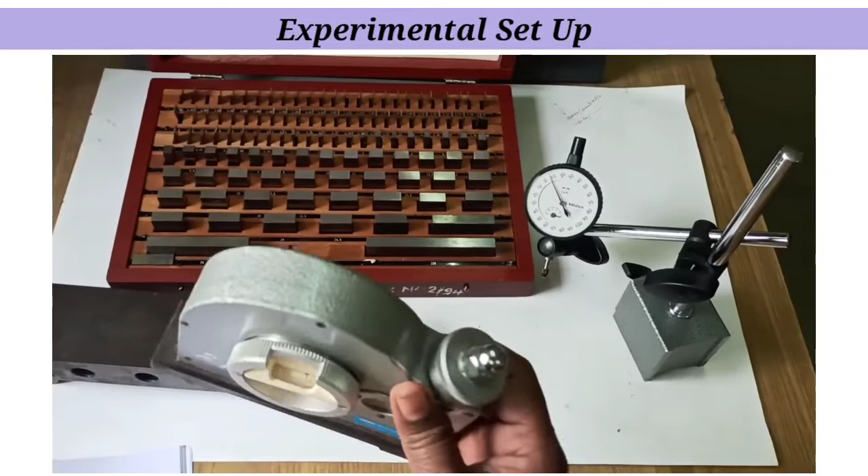Now we will place this component for the measurement by using the bevel clinometer.

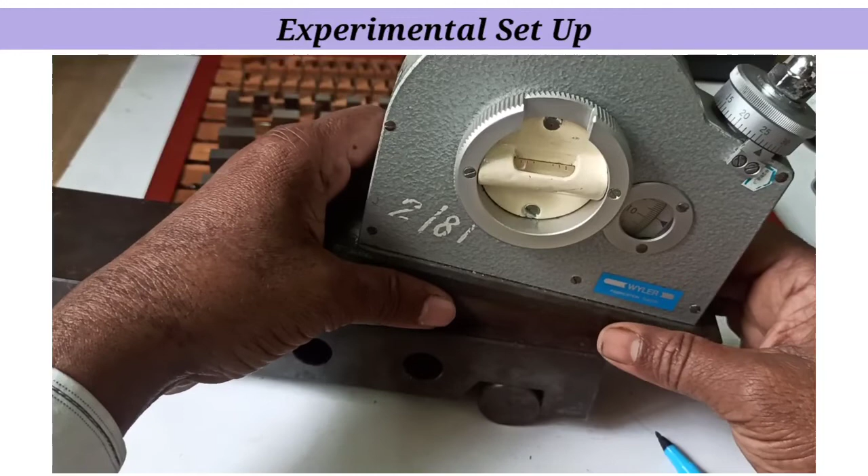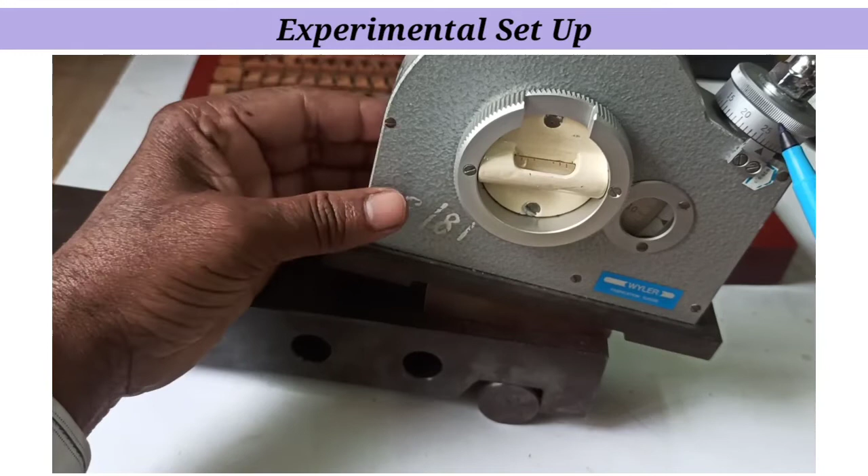So the component is placed here, on which we have to place the clinometer. Now the clinometer is adjusted in such a way that the bubble in the spirit level should be at the central position by turning this rotary scale, which is operated by this micrometer knob. So we'll turn it.

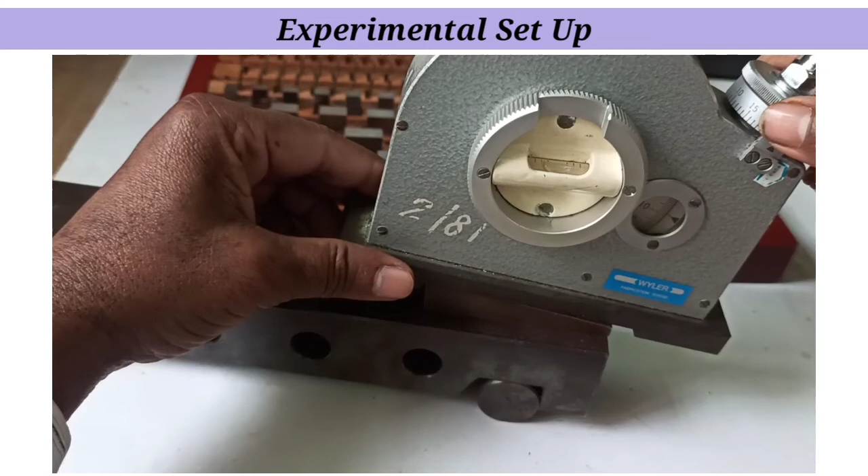Now the bubble in the spirit level tends to move in the right direction, as it is just moving. It is coming approximately at a central position. So next, by fine adjustment, we will locate the bubble position at the exact center.

Now the bubble in the spirit level is located at the exact central position. Now note down the reading. So this is 8 degrees.

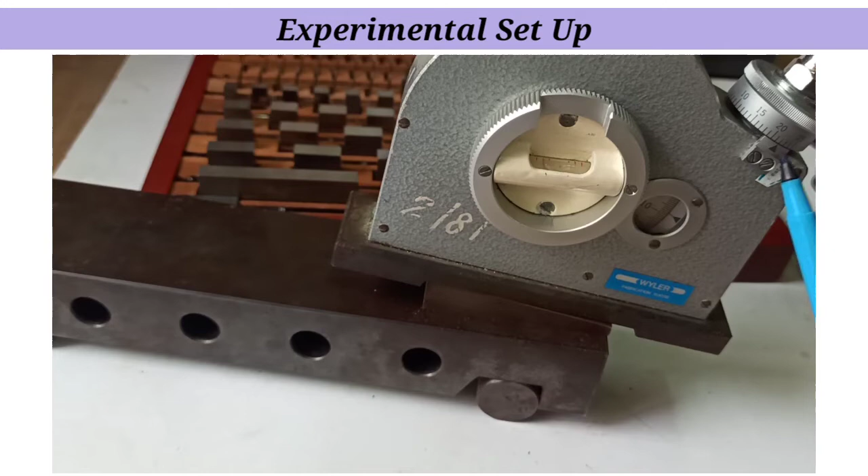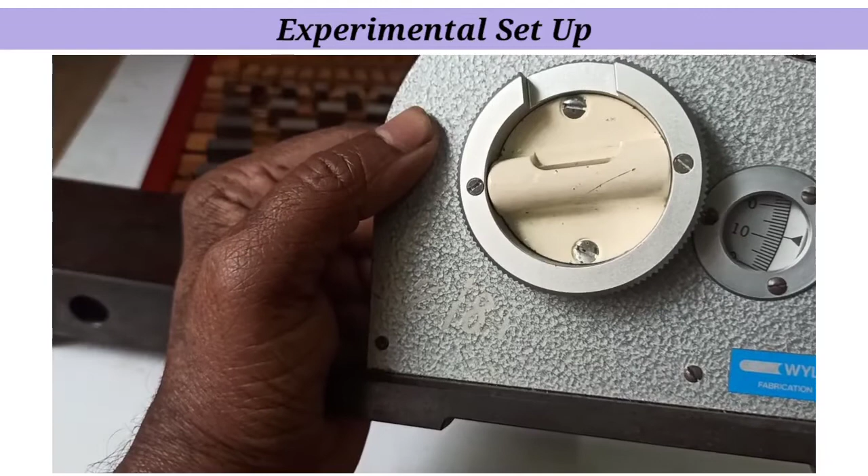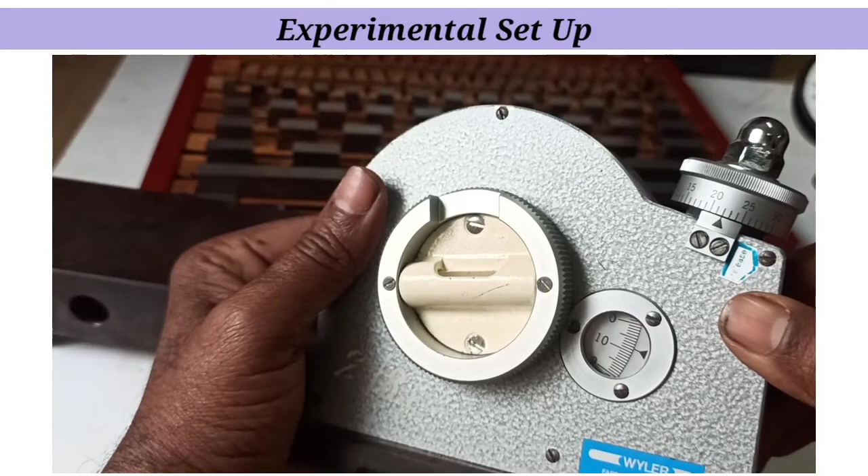You see the exact reading. So it just crosses the 8th division, and so the main scale reading is 8 degrees, and this micrometer scale reading is 22 minutes.

Thus the total approximate angle is 8 degree 22 minutes, measured by this clinometer, is noted down. Now next,

Now we have to find out the height of slip gauges. Already we have measured the angle of the component by using the clinometer, which is 8 degree 22 minute.

Convert this 22 minutes into degrees. So divide 22 by 60. It gives 0.367. So approximate angle is 8.367 degrees. Now using the sine formula, we can find out the height.

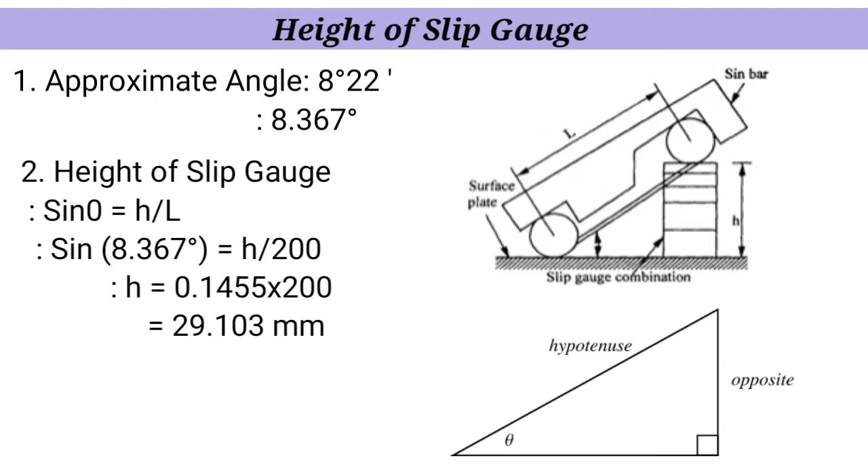Sine theta is equal to h by L. So sine 8.367 is equal to h divided by 200, as L is the center distance of the rollers of the sine bar. Height is 29.103 millimeters.

Next, we have to find out the slip gauges to set the required height of 29.103 millimeters. So from the given set of slip gauge box, consider the first slip gauge within a range of 1.001 to 1.009.

Select the slip gauge of 1.003 and subtract it from 29.103. The remainder is 28.10.

Now next, from the range of 1.01 to 1.49, select the slip gauge of 1.10 millimeter. Subtract it from 28.10, remainder is 27.

Now from the next range, that is from 0.5 to 24.5, select the slip gauge of 2 millimeter. Subtract it from 27, the remainder is 25.

Now from the last range, that is 25 to 100, select the slip gauge of 25, the remainder is 0. Thus the slip gauges required are 1.003, 1.10, 2, and 25 millimeter.

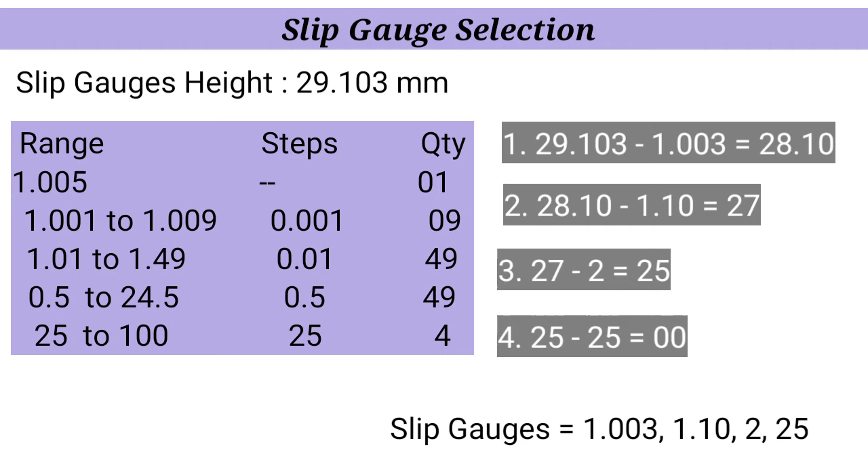Next, clean the surfaces of the slip gauges by using proper cotton, which we are using for the measurement purpose, so that there should be no dust particle on the super finished surfaces of the slip gauges.

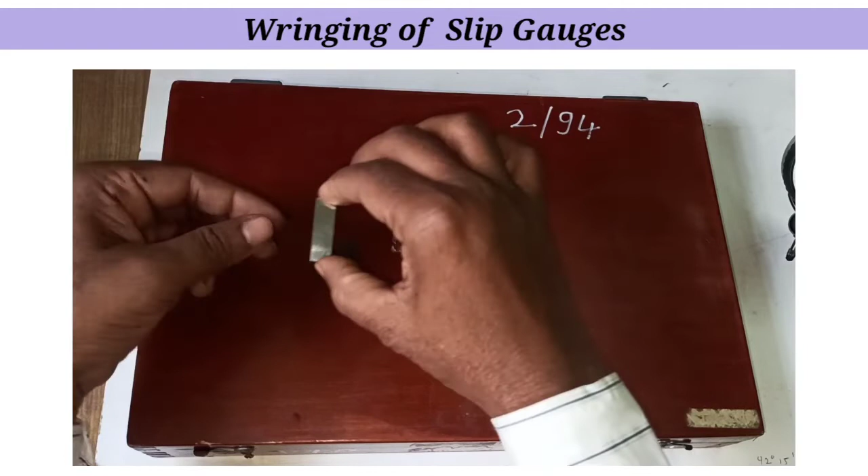I will consider the first piece of 1.005 millimeter. Then next is 1.47. What is the wringing procedure?

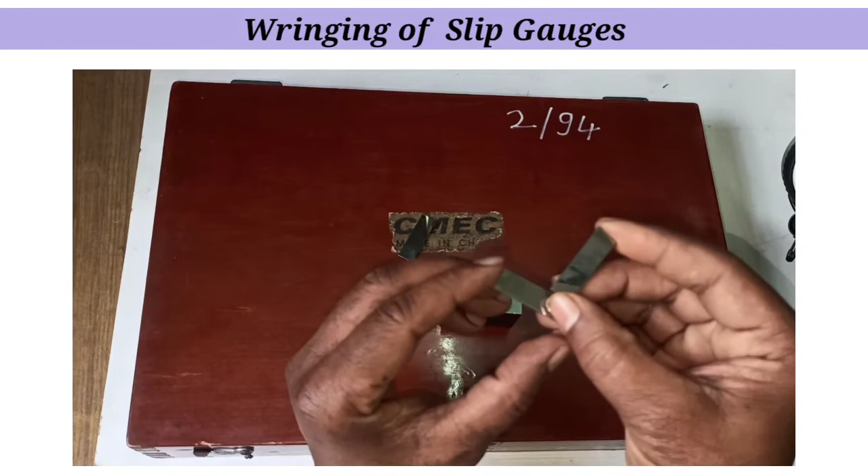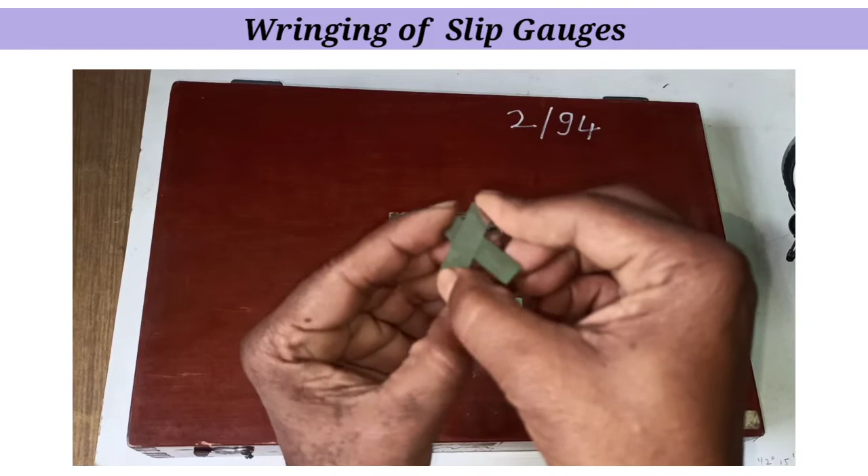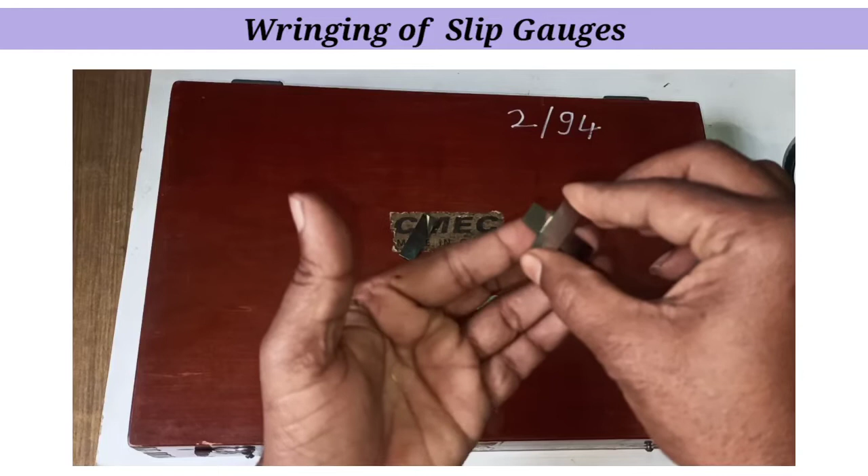Just place these surfaces over each other and just turn it. Squeeze the pressure between these two slip gauges and turn through 90 degrees.

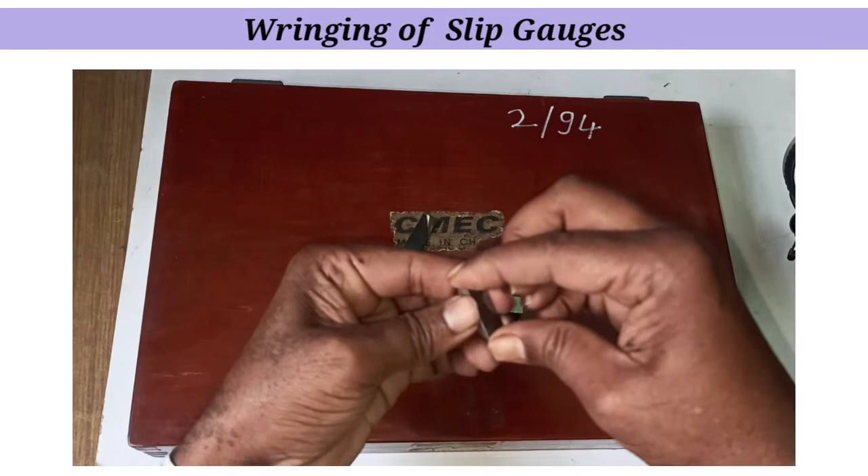Thus the slip gauges are wrung together with each other. Then consider the next piece. Clean its top surface.

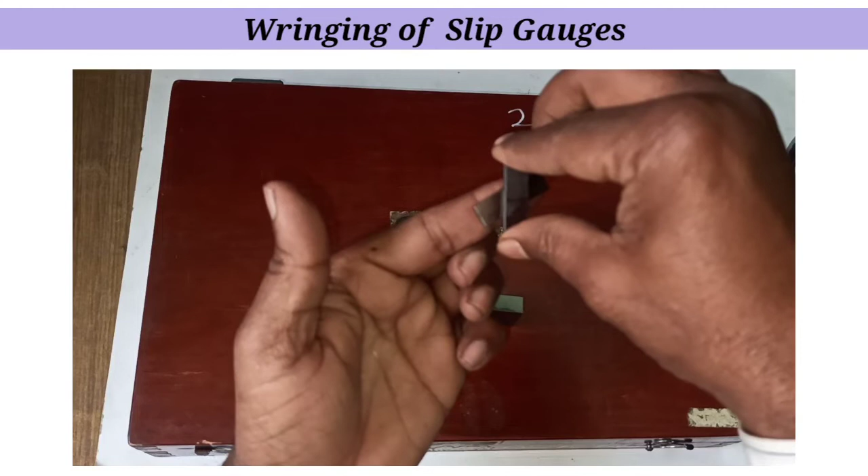Again place over each other. Just turn through 90 degrees. Thus the wringing is done here.

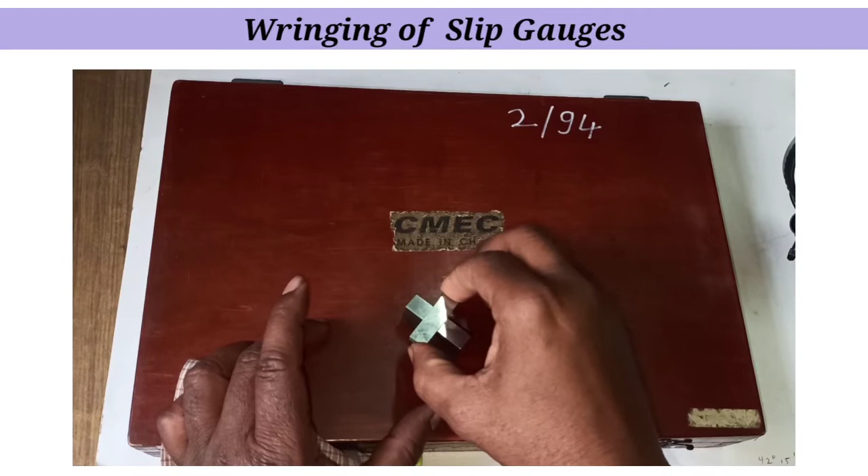Now consider the last piece. Clean its surface. Now place it at 90 degrees and just turn through 90 degrees so that they will wring with each other.

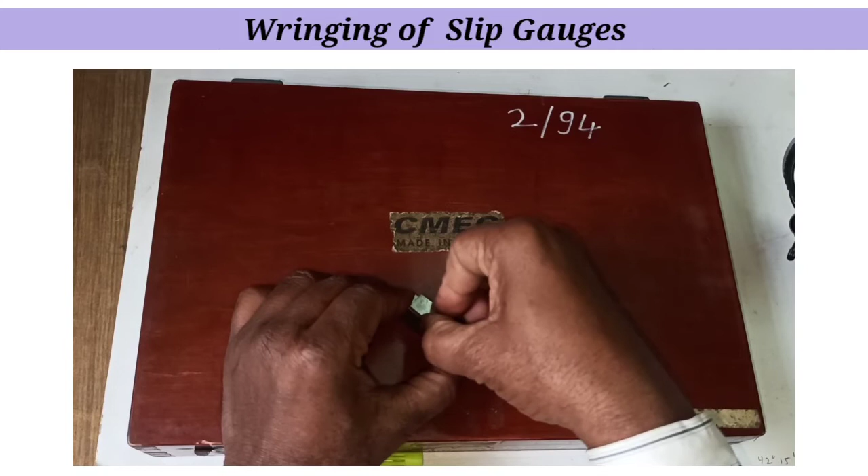Thus all these four pieces are wrung together by using the phenomenon of wringing.

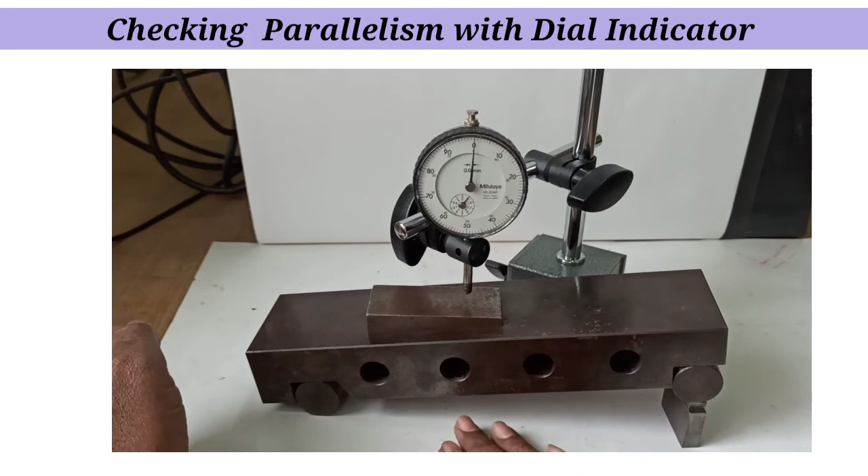Now in this last stage we have to check the parallelism of the surface with the top surface of a surface plate. Place the component on the sine bar. This is a dial indicator by which we measure the parallelism by observing the deflection made by this pointer while this plunger moves across the surface.

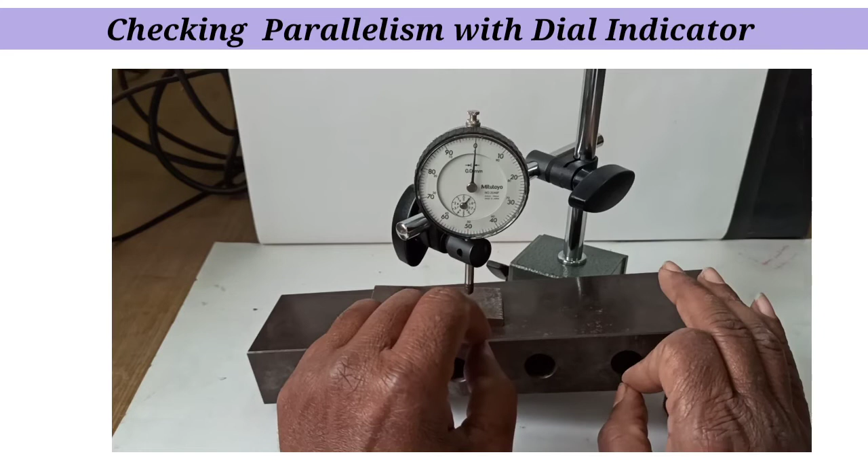This dial indicator has a total of 100 divisions. The value of one division is 0.01 millimeter, that is 10 micron.

Now when we place this plunger on the top surface of a component, as the plunger moves in the upward direction, the pointer moves in the clockwise direction.

We have to check the parallelism of this surface from this left side. Now we have to set this dial indicator for zero error. The dial indicator is now set for zero.

Now we have to move this dial indicator across the surface. Just move this stand and observe the pointer deflection.

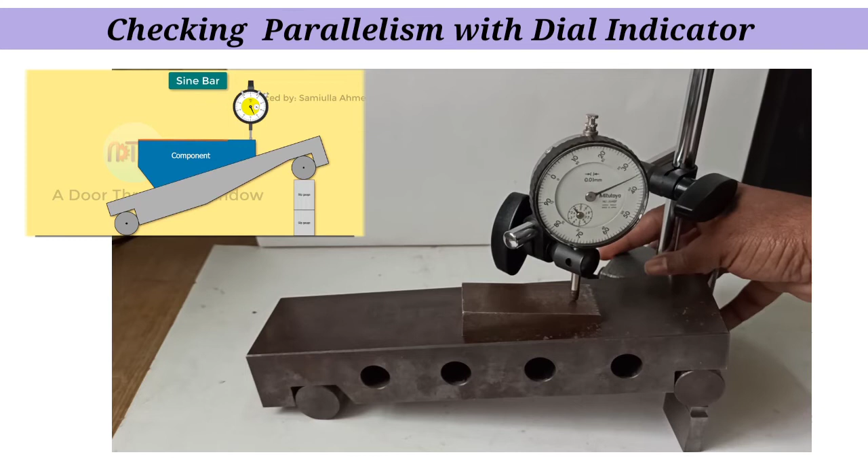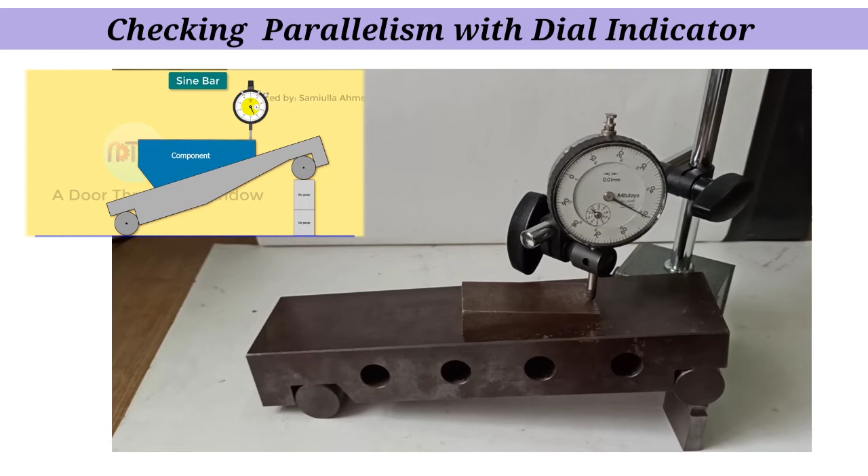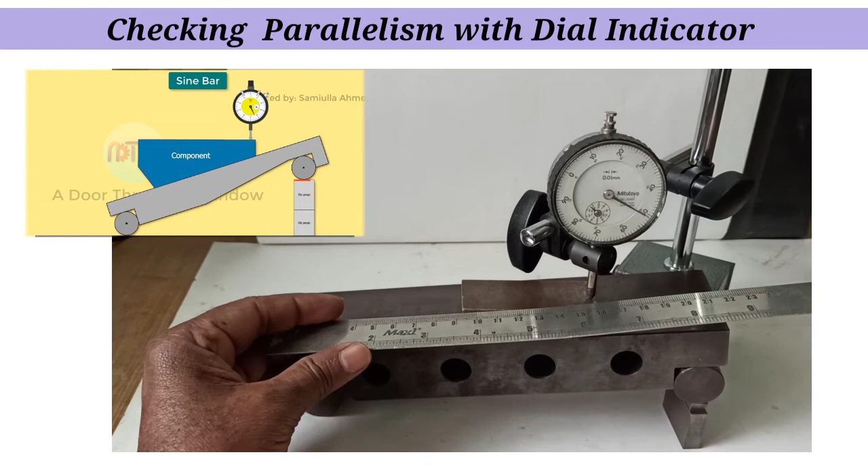As the pointer is moving in the clockwise direction, this surface is not exactly parallel to the reference surface of the surface plate. This means the surface is somewhat in the upward direction, like this, so that the plunger of the dial indicator is moving upward.

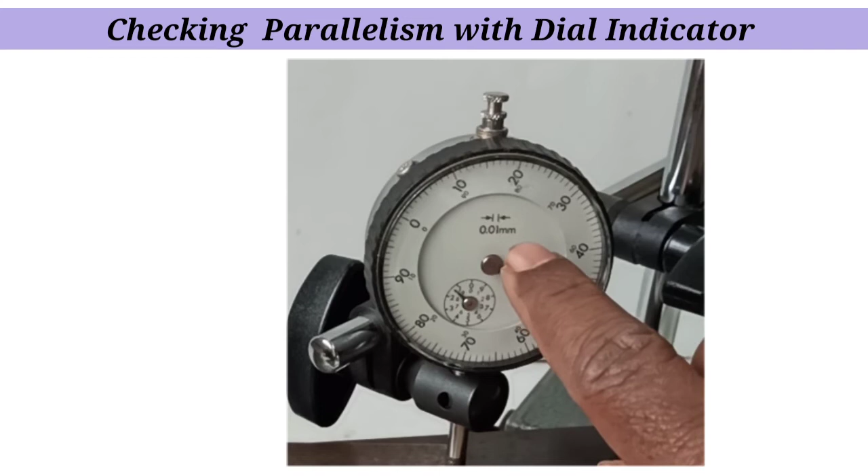So we have to note down the deviation. The pointer is moving from 0 to the 50th division, meaning we multiply 50 by 0.01 millimeter. So this value is 0.5 millimeter.

The surface is inclined in the upward direction with reference to this flat surface. So we have to reduce this slip gauge height by an amount of 0.5 millimeter.

Then again recalculate the required slip gauge height and put the new stack of slip gauges under this roller, and again note down the deflection. If the deflection is 0, then we can conclude that this surface and the reference surface are parallel to each other.

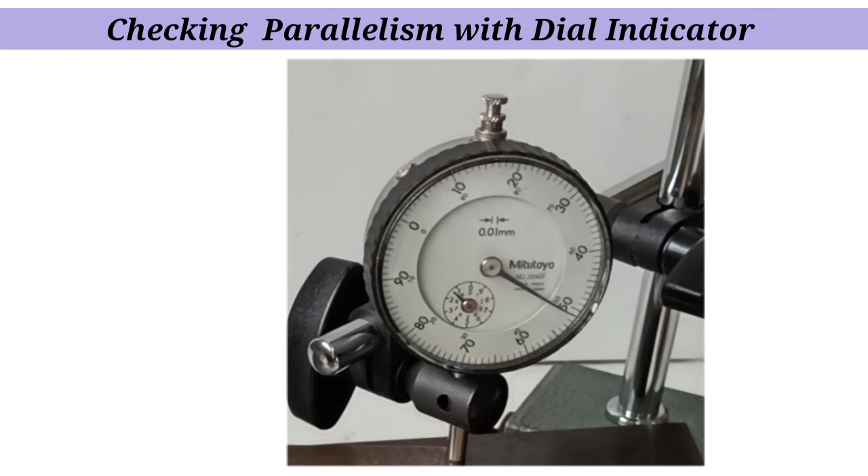So after performing the practical, we find that the dial indicator deviation, delta H, is 0.5 millimeter. So accordingly we have to set a new slip gauge height. The new dimension H1 is 29.103 minus 0.5, so the new dimension is 28.603 millimeter.

Correspondingly, select the new slip gauges, stack the new height, and put it under one of the rollers of the sine bar. Again perform the same experiment to get a 0 deviation of the dial indicator.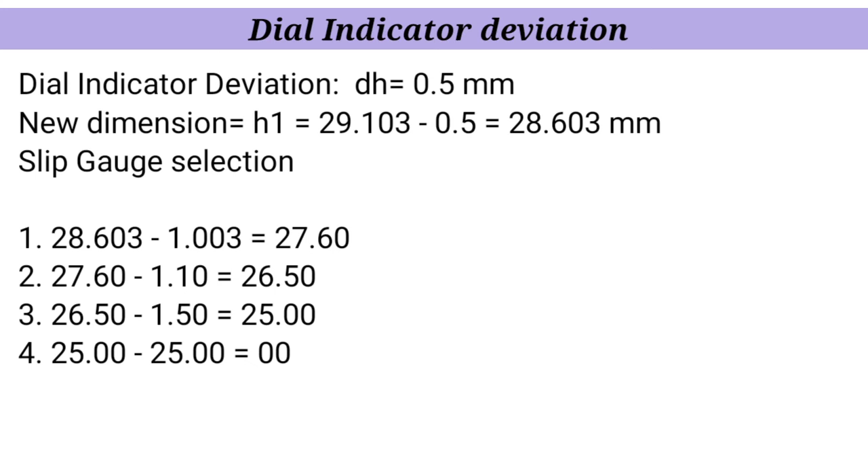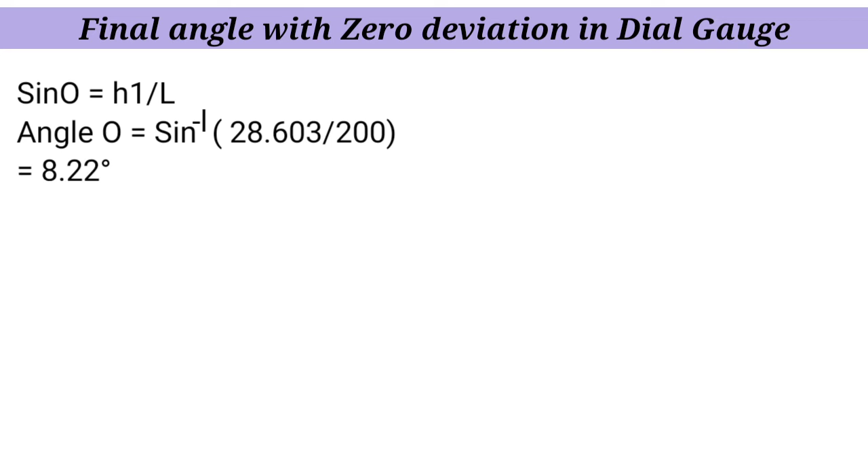Now find the final angle having zero deviation in the dial gauge with the new slip gauge height. So sin theta equals H1 by L. So angle theta equals the sine inverse of the new height of 28.603, with L of 200. So the new angle is 8.22 degrees.

Convert this 0.22 into minutes, giving 8 degrees 13.2 minutes. Again convert this 0.2 minute into seconds, giving 8 degrees 13 minutes and 12 seconds. So the new angle is 8 degrees 13 minutes and 12 seconds.

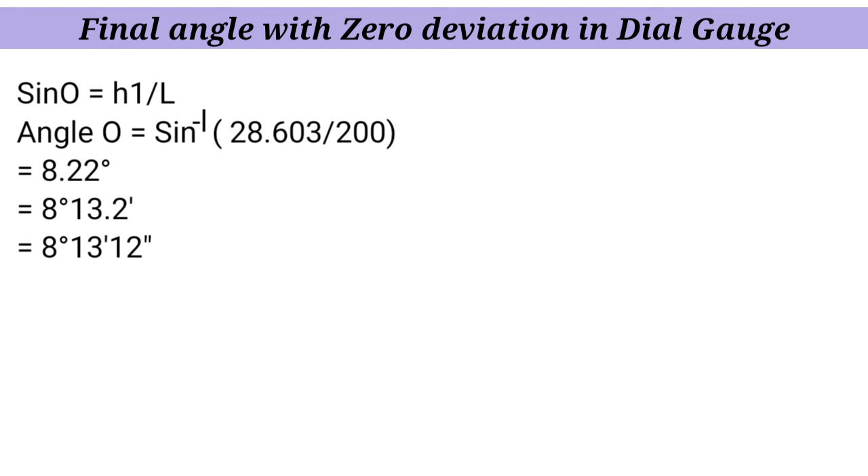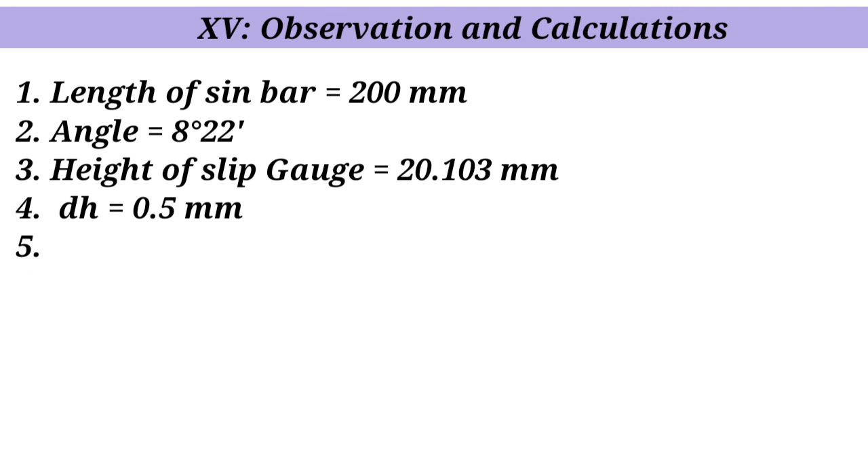Now note down the observations and calculations. First is the length of the sine bar, which is about 200 millimeter. Then the approximate angle, which we measured using the clinometer, is 8 degrees 22 minutes. So by using the sine formula, find out the height of the slip gauge.

H is 29.103 millimeter. Then after performing the practical setup, find out the deviation by checking the parallelism with the help of a sine bar and dial indicator. The deviation is 0.5 millimeter.

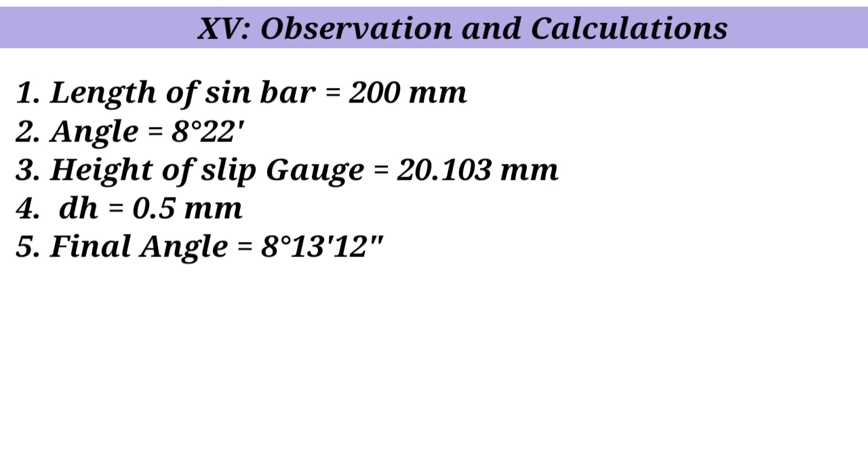Then with the new height, set up the required slip gauge and again check for zero deviation. Then the new or final angle is 8 degrees 13 minutes and 12 seconds.

So in result, note down that the approximate angle which we measured using the clinometer is 8 degrees 22 minutes, and after performing the practical using the sine bar and dial indicator, the final angle is 8 degrees 13 minutes and 12 seconds.

In interpretation of the result, after performing the practical, we find the difference in angle is 8 minutes and 48 seconds. So in conclusion, we can say that after performing the practical, we are able to finalize the angle in terms of the second level.

So thus, by using the slip gauge box, sine bar, and dial indicator, we can measure the angle up to the second level.